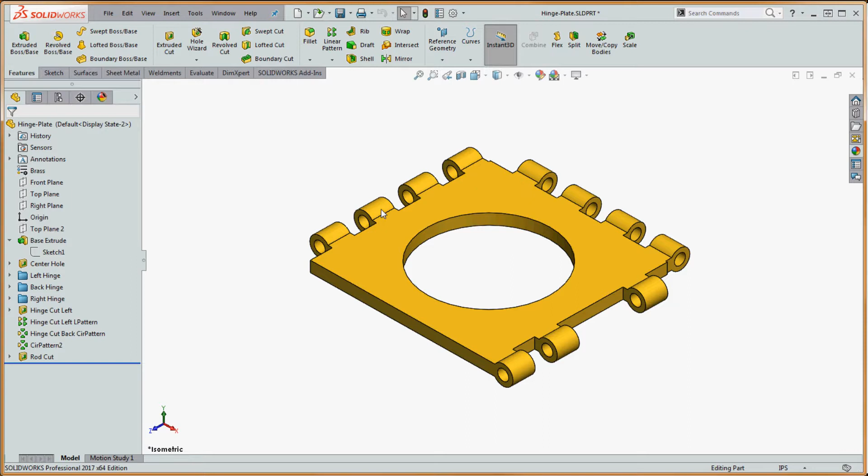So what we're going to be doing is making a cut here, and then with the linear sketch pattern we're going to take that square, that rectangle that's going to define this cut here, and pattern it at 1/2 inch all the way down to the end of our hinge plate.

So let's do this. Let's go ahead and go to our top plane, and let's go ahead and go normal to that, and we're going to take a look at that. If we click on the top plane, go over here to our view orientation, let's go ahead and scroll down to the normal button, and we're going to take a look at it here.

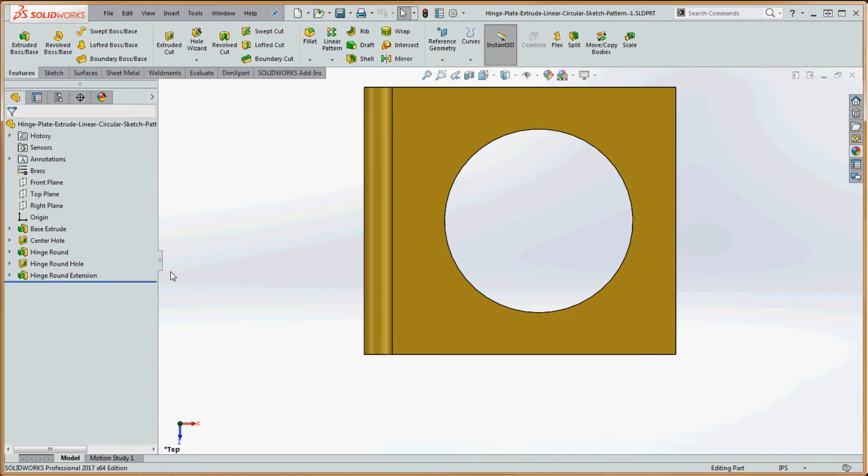What we want to do is go ahead and open up the existing sketch that we have in here, which is going to be sketch 1. We're not going to necessarily open it up, but we definitely want to show it. So we're going to right click on that, and tell it to show, because we're going to borrow some of the sketch geometry in order to put this together.

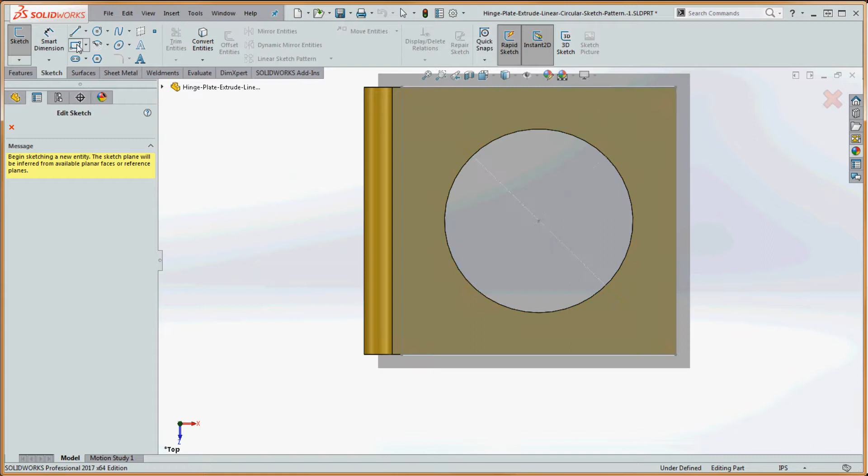So with that showing, we're going to go to sketch, go to corner rectangle, and start over here in the corner. We're going to go ahead and start on this surface over here in order to put that together.

Escape once if you accidentally put your cursor already down, but right click again and get you right back into that command. So just looking for geometry to sketch from.

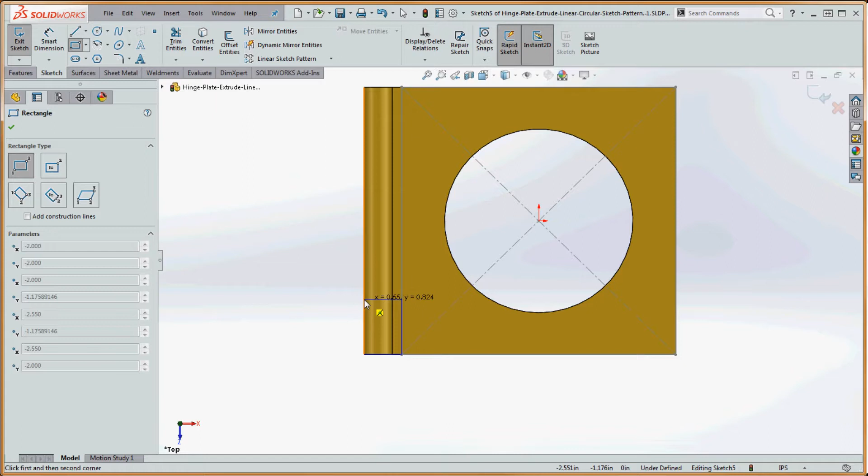We're going to go ahead and start with that point over here, sketch it over here. If we can pick up that, you can see that orange selection of that edge. We're going to go ahead and try to pick that up, and you can see the preview of what we're going to be getting in regard to the sketch relationship, which is going to be a coincident relationship, and we're going to go ahead and use that.

So now that we have that in place, we have a coincident relationship over here, coincident relationship in the lower right hand side, 2 verticals and 2 horizontals, and it's almost fully defined. What's not defined over here is the length of that, so we're going to go ahead and put a dimension on that, a smart dimension of 1/2 inch, so 0.5.

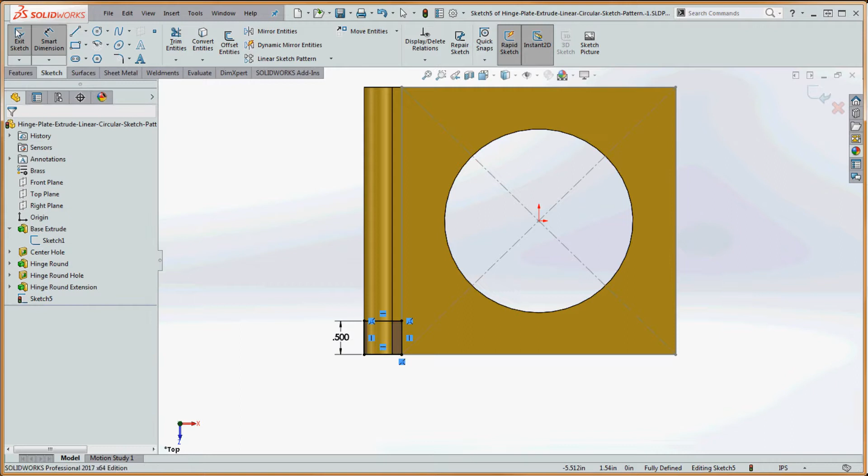And now we're going to go ahead and cut that. So we're going to go to Features, go to Extruded Cut. I'm going to go to Through All. And if we go to the green check mark, you'll notice we still have a little piece in here.

So what we had in here is we started from that plane. We did Through All, which went through all down to the bottom. What we really want to do is take that feature and do Through All in 2 directions, both directions.

And what that does is it's going to open up our direction number 2 down here when we do that. Let's go to Through All both, and it's going to go ahead and check mark that, and it's going to go Through All on the other side too.

So a little bit of a time saver. You make one selection here instead of having to come down here and check that box and go to Through All over here too. So you save yourself a few steps.

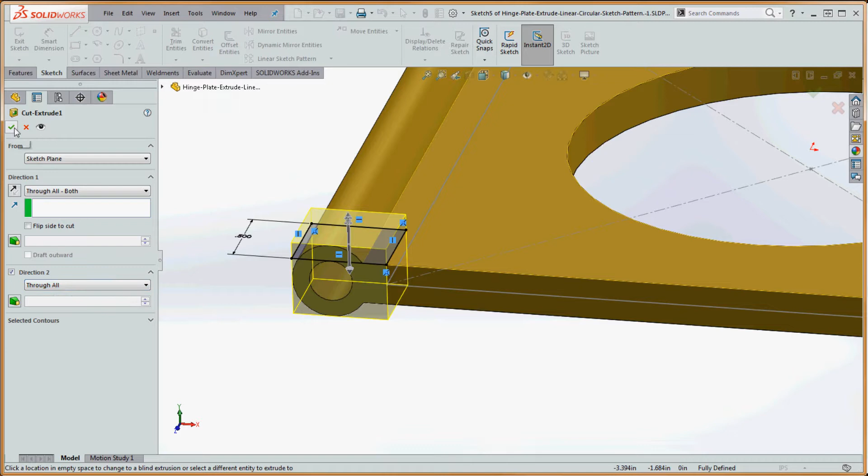Go to the green check mark, and now we have that in place. So let's go ahead and go to the isometric view and take a look at that from the very top, and we'll go on to the next step.

So just before we get into our linear feature pattern, let's go ahead and rename our cut extrude. We're going to call that something a little bit more descriptive and call that our hinge cut.

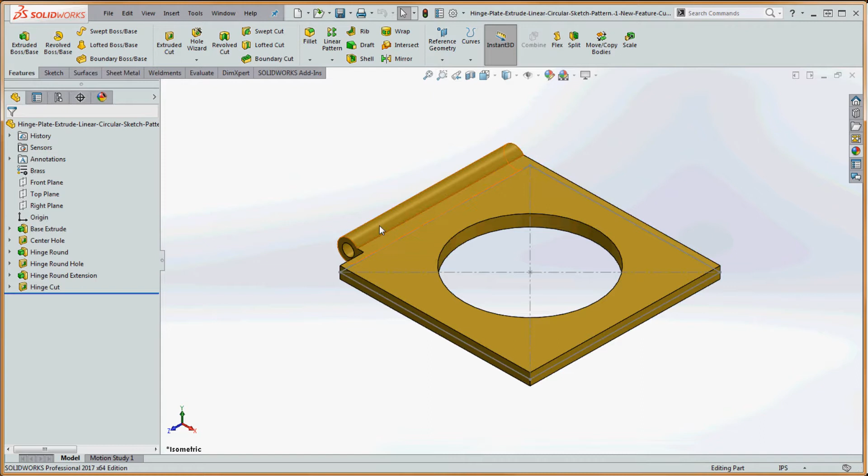So now we're going to take that hinge cut and we are going to pattern it, just like we did with the linear sketch pattern, up the hinge round. Let's go ahead and turn that model around a little bit and take a look at this and see if we can apply that.

First thing you want to do is go up to your Feature tab, go over here to Linear Pattern. We're going to go ahead and click on this, and this is just going to be a quick tour so I can show you some of the basics, because there is a lot in here and we don't necessarily need to go through all of this right now. We're going to save a lot of that detail for another video.

Essentially, from the very top, it's asking for a direction. So just like we did before, you want to click on an edge, and it's going to help define that. We know that this edge, since it's already involved in that feature, we're going to go ahead and click on this edge rather than another edge. If that other edge were to disappear or get modeled out of the model, we're not going to be able to select that. So we're going to select something that's pretty close to what we're going to be modifying, and we have a couple different choices here: spacing and instances.

So for instance, we could put a spacing in there. We know the spacing is going to be 1 — there's going to be one full cycle between a cut and a hinge and then back to the cut again. So we're going to type in 1 there. If we click off of the modeling area, that'll clear that. And then we're going to have 4 instances altogether.

We're not going to do a direction 2, although we're going to demonstrate that here in just a minute so we can see kind of a checkerboard as this thing goes across our item, because we don't necessarily have to stay within a linear direction as it implies. It could be kind of a matrix — in a way, it's like populating a feature within an area. It could be linear, but it could also expand across an area too.

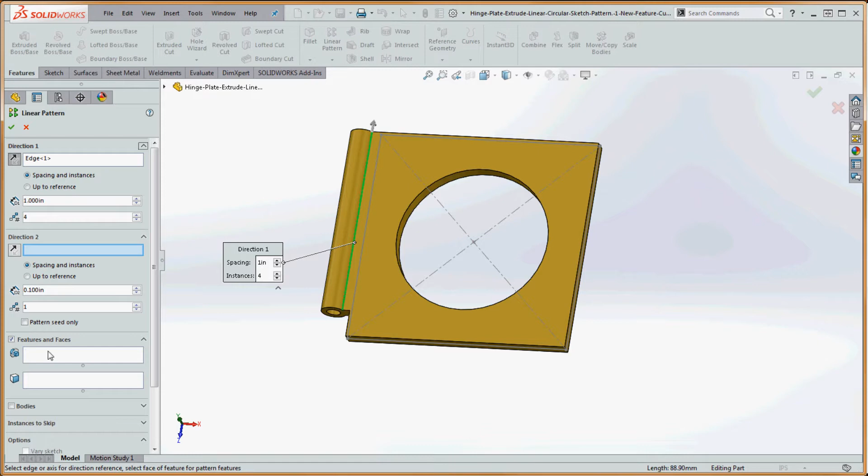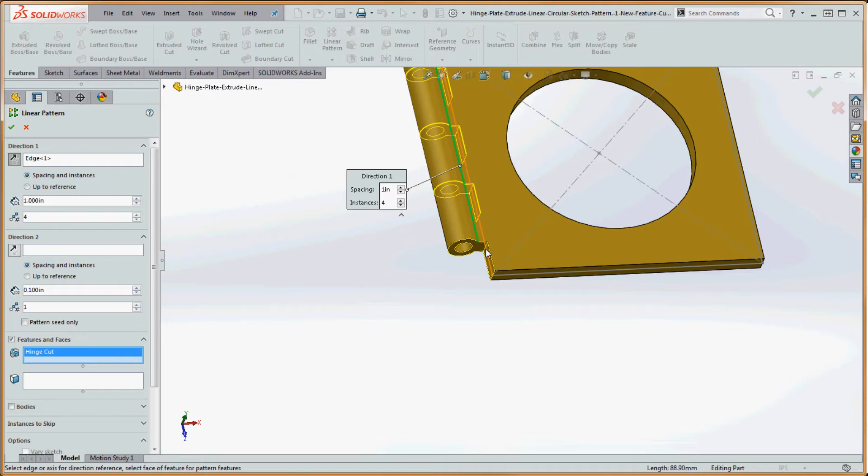Features and faces — a couple of different ways we could do this. We could select it within the modeling area and just select a face that might define what that cut was. That's going to be unique to that cut, so this face would work, but that face wouldn't. This face would work, but again, that face wouldn't either. So we can select it that way. It's going to put in that face in there, and it's going to borrow everything that's associated with that feature. Then if we go to the green check mark, now we have that in place.

So real quick, just to show you a different option: if we right-click and go back to the Linear Pattern, instead of going to that hinge cut, it did choose that actual name for that feature. So when we chose that face, it actually chose that feature. But we can go to the feature flyout and do the same thing — we can go down here to the hinge cut, select that, and then go to the green check mark.

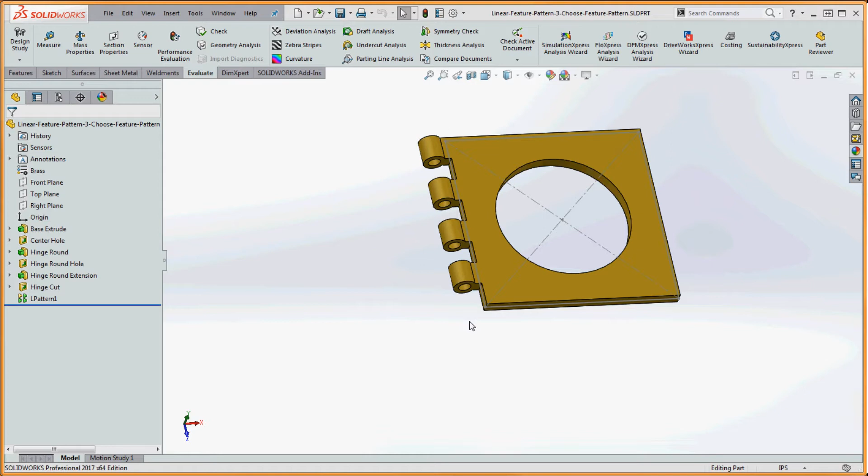Okay, now that we have a linear pattern the way we like it, we're going to break this and look at some other options on linear pattern from the top to the bottom. We're not going to look through all of them because we don't have a whole lot of time, but some of the basic ones I'd like to show you and what they might do.

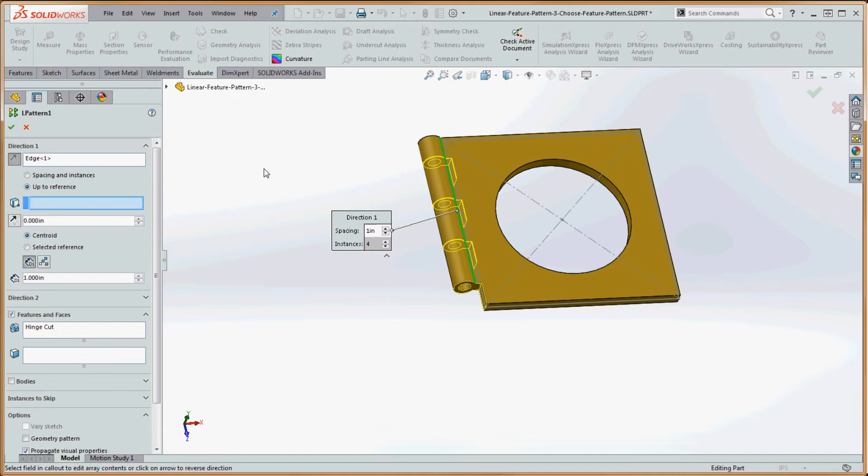So if you start from the top, we chose our edge, we're going to keep that. We did spacing and instances, but let's go ahead and do up to reference instead. If we click on that radio button, these two items over here, the distance and the instances, are going to disappear, at least some of those are going to get moved down. But for reference, we're going to choose this surface up here.

So if you think about what we're going to be doing, we're going to take that cut, go up to that surface, and put so many elements in here.

So the first thing it asks for down here is an offset. I'm taking my cursor and resting it over that input box, that selection box. If we type in maybe 2 inches out of a 4-inch block—oops, not 4 inches, we want 2 inches—it's going to ignore the first 2 inches of that 4-inch block. So if we did 1, it's going to ignore that top one up here and it's not going to give us what we're looking for. But that's what that offset does. So we're going to change that back to 0.

Now we're going to move down a little bit. We're going to continue to use Centroid in here, and now we're going to do our cut. Our cycle is going to be 1 inch, our cut's going to be a half inch. So if you do the distance down here of 1 inch and go to the green check mark, it still gives us what we're looking for down here. So that's yet another way of doing the very same thing.

So again, we chose that edge, no offset over here. We did the centroid of that cut, right in the middle of that cut, and then we're going to go off at a distance of 1 inch.

So while we're here, let's go ahead and take that bottom choice and change that. So a number of instances is another way of doing that. We're going to take the center of that cut and provide 4 instances in here. So this gives us something that's just a little bit different.

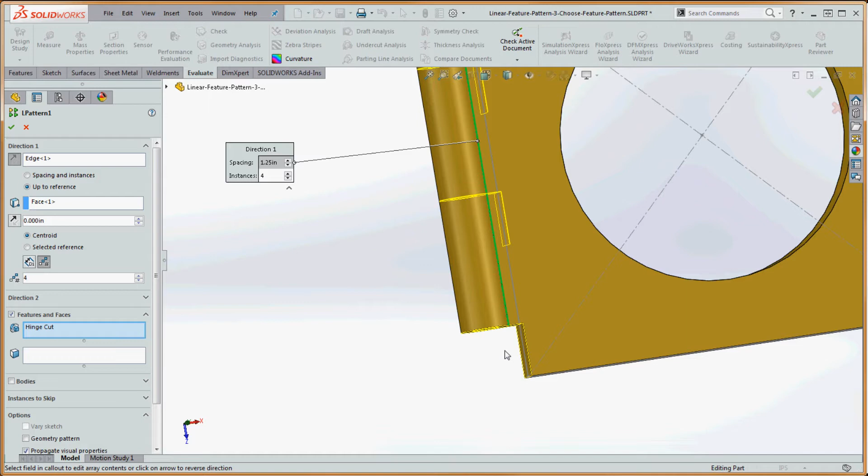What SolidWorks is going to do is take the centroid of that cut, the very center of that cut, kind of like a mid-plane extrusion, put it up here, extrude it back and forth, put it up here, back and forth, up and down, and then up here it's going to do down and then up, but the up is cutting into a void, so we're going to get something that isn't quite right. If you go to the green check mark, maybe this is something you might like to do, but what we have in here is a half inch cut here, half inch cut here, half inch cut here, then only a quarter inch cut over here. So these items inside of this are going to be a little bit longer. Let's see what those are.

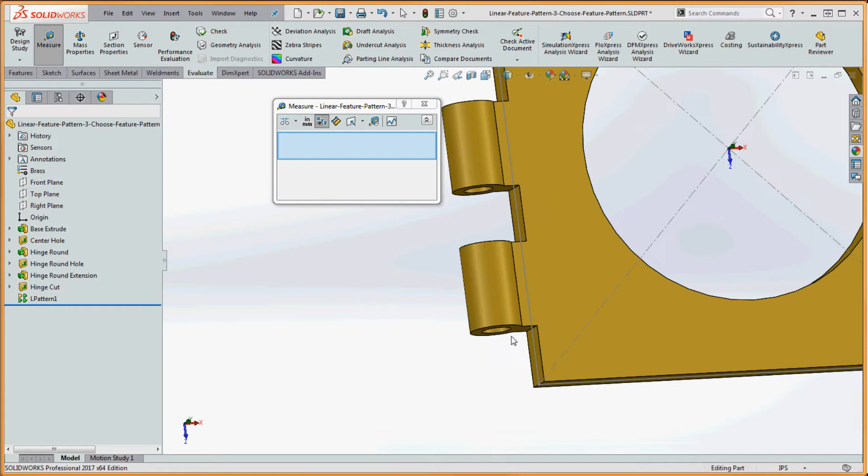If we go up to measure and click on some of these faces in here, that face of that hinge round and that one too, it's actually 3/4 inch. So what it's doing is taking the centroid of this cut, putting it here, cutting it top to bottom, putting it here, top to bottom, or left to right, or back to front. Then up here it's doing the same thing off of that surface, and of course the cut up here is not going to matter, and it's going to take whatever value is left for the distance it needs to allocate between these 3 hinge rounds. It's going to divide that by 3.

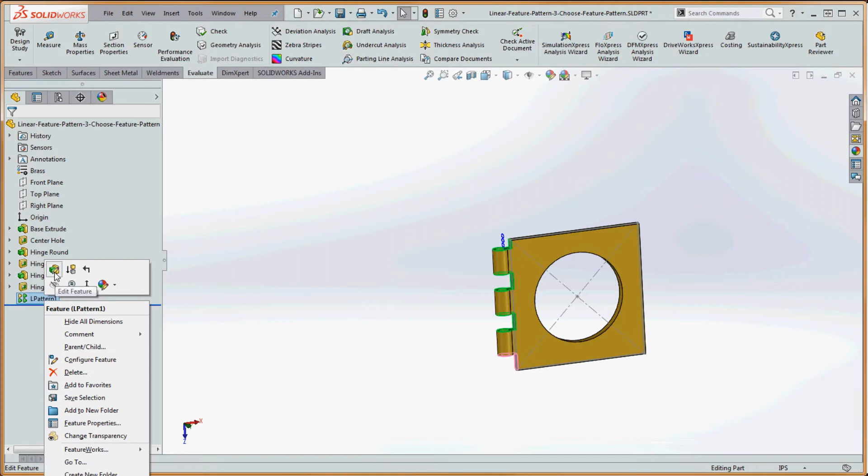And that gives us 3/4 of an inch. Not quite what we're looking for there, but it kind of shows you what it's thinking if we want to use that.

Another thing to do is, we did our instances in here, but we can go to selected reference and provide a different reference. If we select selected reference and choose this face of the cut, now it's going to do something a little bit different than what we had before.

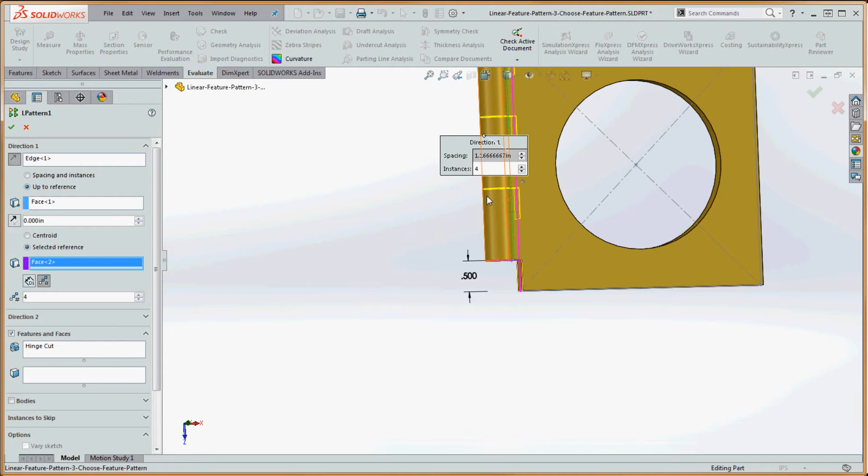We're going to ignore this because it hasn't really updated yet, but this dialog box that we can make changes to is going to change with it. So now what it's doing is taking that cut surface, and you can see the preview, it's going to cut it going down.

This one we're going to cut off that surface and come down, and at the very top surface here, the surface we selected for the direction, it's going to cut from that one down too.

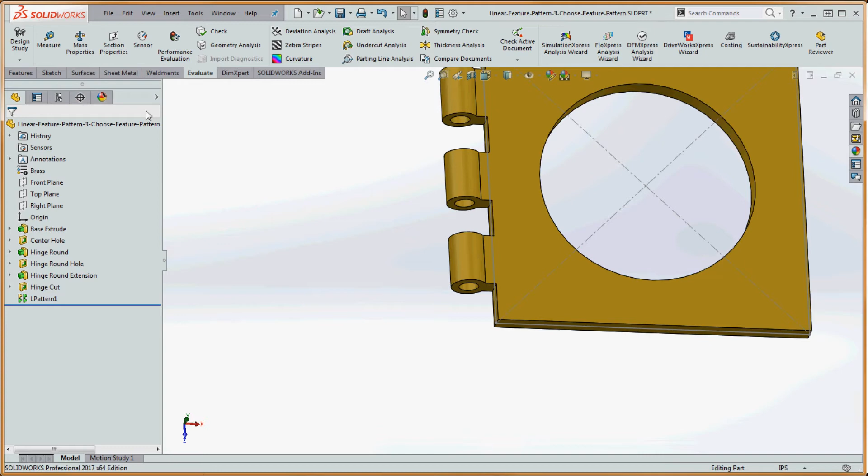So if we go to the green check mark, now we have what we want. And it should be the distance, it should be 1 inch between that surface and the other surface up there too. So let's go to measure, just to double check that.

Let's click this surface on that hinge round and that surface. And now it's not 1 inch, but 2/3 of an inch.

So what happened there? What it's doing is putting in 1, 2, 3, 4 cuts, but only 3 hinge rounds. So it's making a pattern of those cuts. By doing it, it puts in 4 cuts, but only 3 hinge rounds, so it's now right down the middle of our part.

It should be symmetrical. So let's go back into that and see what that looks like. So we did select a reference, did 4 cuts, but now it only has 3 hinge rounds. A little bit different way of doing it.

But those are some of the choices that you have. And if you go to the green check mark, it's going to go ahead and rebuild that.

Okay, so now this is broken, and what we just did is put in these 4 cuts. Instead of giving us 4 hinge rounds, now we have 3 hinge rounds right in the middle of the thing. So that might be something you'd like to do.

But let's go back into our linear pattern and break this some more. Let's go back to our original feature and go to some of the different options in this Properties Manager. If we go to Spacing and Instances, it's remembered the spacing we had before.

We're going to go ahead, and if we keep that spacing, let's see what happens. So it actually keeps that.

So if we go right back to linear pattern and do spacing and instances, we actually want to make that 1 inch. Again, we're going to bring that cut in from the top and make 4 of those elements. So now we have 4 cuts, and we also have 4 hinge rounds in there too.

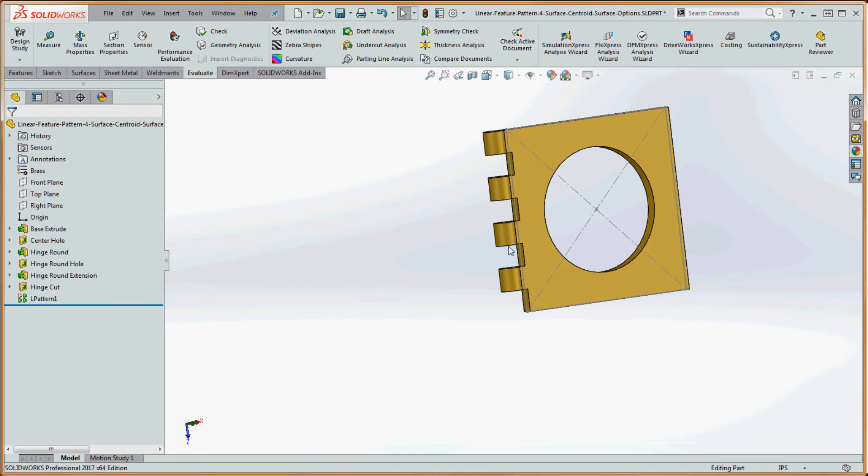So again, back to linear pattern, a little bit simpler this time. We're going to move down to Bodies. If we were to go in here and select different bodies, we could do that.

If you remember, the original hinge round in here was a separate body. So when you're doing a separate body here, you can't really choose features, at least not as easily. It doesn't always work that way, but bodies will work too.

So if we had separate bodies we wanted to choose around this model, that is a separate cylinder, we can do a linear pattern with that if we wanted to. So that's what bodies do.

Instances to skip, kind of like with the linear sketch pattern. We have the capacity to do that too.

So let's go ahead and rebuild this. We don't want to do bodies, we want to do features, so let's go back and re-choose that. Now you can see the preview of what we're going to be getting.

So for instances to skip, if you click inside of that, now we have those magenta or red balls in here. If we click on those, the magenta balls actually turn yellow for the instances we want to skip. So now we're going to skip the second instance, keep the third, but skip the fourth.

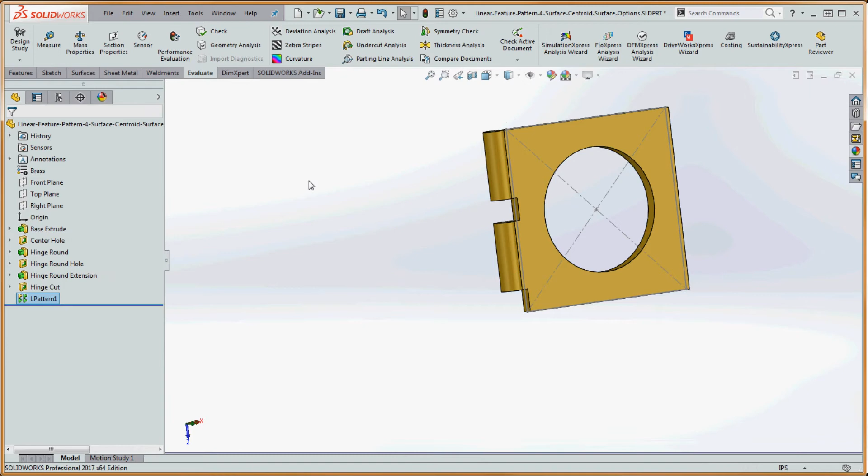Go to the green check mark, and now you can see what we're going to get with that. So we're going to go ahead and delete these.

We can go back into our modeling area and reselect that yellow button to get that magenta sphere or button back in. That's going to give us a preview of what we're going to be getting, back to where we were before.

Options. Geometry pattern is just a different way mathematically that SolidWorks will solve it. So if it doesn't quite work one way, you might consider geometry pattern as a way to try to make that work. Propagate Visual Properties.

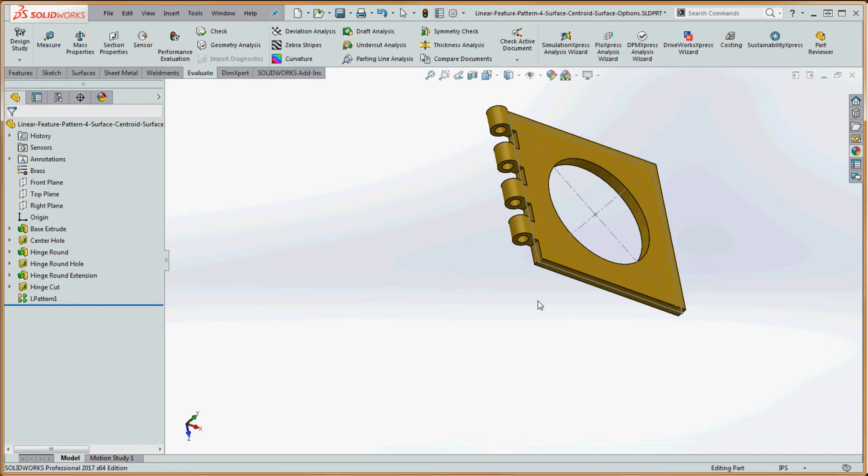Let's go ahead and do this real quick with our cut in here. Right now everything is pretty much homogeneous, but we can right click on that surface, and this is a real quick aside here, but we're going to go ahead and talk about visual properties in a different video.

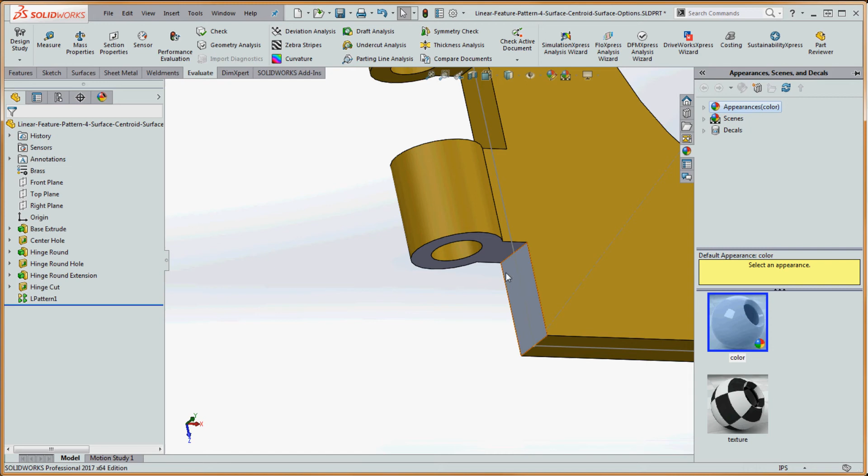If we were to change that and maybe make that hinge cut up here, we're just going to go back to gray instead of the brass color and go to the green check mark. So what it is, I just right-clicked on something that's endemic of that cut. I went up here to Appearances by right-clicking on that, and we just chose gray to be that hinge cut. So now that feature has got that gray color to it.

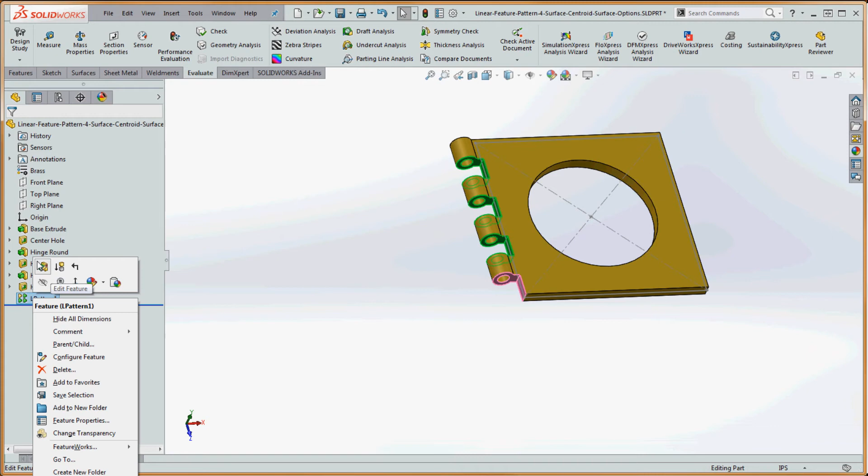If we were to go back to the linear pattern and make that change over here in regard to propagating visual properties, you'll notice that it isn't being propagated right now. If we right-click on that and go to Propagate Visual Properties, then go to the green check mark, now it's going to have that. So we had to make that change first and then update that.

So that's another option here: right-click back into linear pattern, and we can do the full preview, partial preview. We did instances to skip, instances to vary.

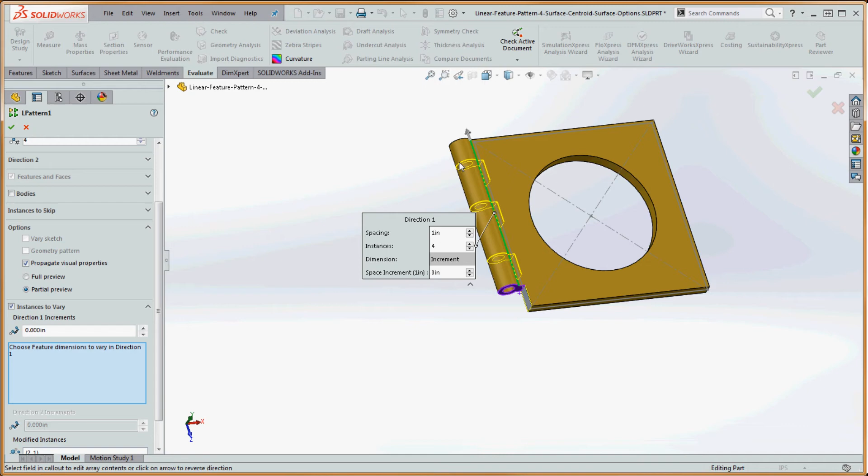We can click inside of this. It's a little bit more complicated, but for each one of these instances that we have here with that magenta ball or button, if we click on that, we can make a modification to that instance, that one instance only. Right now the spacing is 1 inch. We can make that one maybe 3/4 of an inch, and we could do that for each one of these.

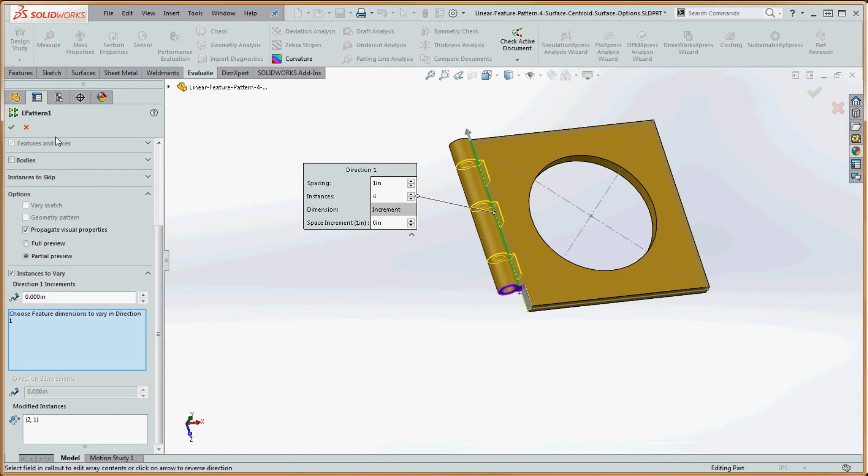So we're not going to spend a lot of time here; we're going to cover that in a different video with a lot more modifications. But just like with instances to skip, it gives us the coordinates of the different instances that are being modified, and then individually they show up in the modeling area, where we can make modifications too. If we go to the green check mark, now you can see that. If we click inside of this, we can change some of these values, or go back into our pattern and make our changes there too.

So one thing else I want to show you here before we leave this, let's go ahead and go to the green check mark, and then we're going to come right back to this. So we almost have this really broken, and we're going to make it even more broken here.

If we go back to our linear pattern and check one more option here I'd like to show you. We've done everything in a linear way along what's called a linear feature pattern, but we could actually make a matrix out of this and populate a pattern about an area rather than just along a line. We could do that too, and what we want to do is go down here to direction 2 and open that up to make modifications.

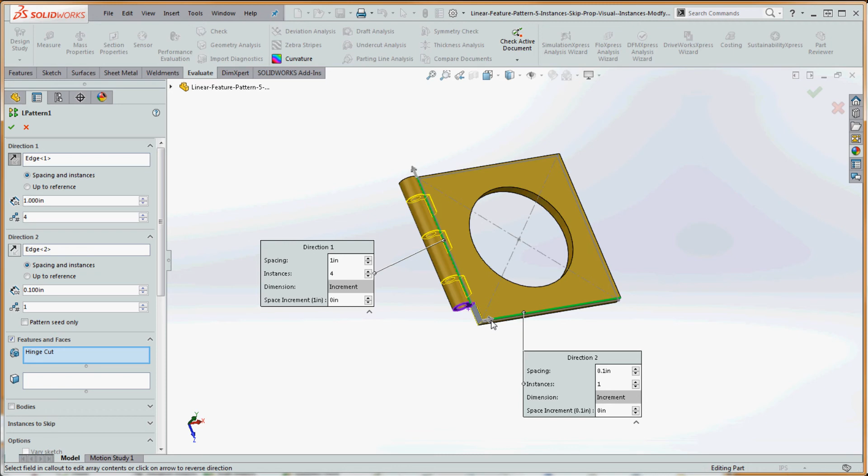So with direction 2, we can define yet another edge and go off in a different direction. You notice we have an arrow down here too. We can change the direction. We didn't talk about that last time, it's a little bit obscure. Can't really zoom in on it, but you can see that arrow down here. You can change direction, or go up here with our direction and maybe change the direction over here too, that button right next to the edge we're making the selection for. So the distance here, maybe half an inch. And then instances, remember, is just going to keep that one instance and keep it linear unless we type in a value that's more than 1.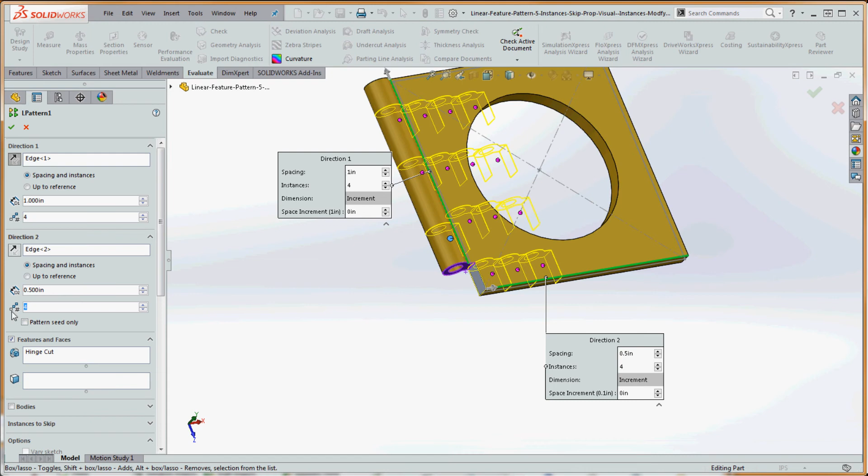So if you do maybe 4, you can see what that pattern is going to look like. Maybe 7, take it all the way to the end. And maybe half inch is probably a little bit too close, maybe 3/4 of an inch, see what that looks like. So now you can see what that looks like.

So it's taking that original pattern, kind of ignoring the modification we made down here, and it's putting it up there. So these boxes kind of start getting in the way after a while. If you want to minimize them, you can do that too.

And for each one of these elements in here, if you want to make a change to that, if you go into that and modify the instance, you can do it there too, and it brings up yet another dialog box you can play around with.

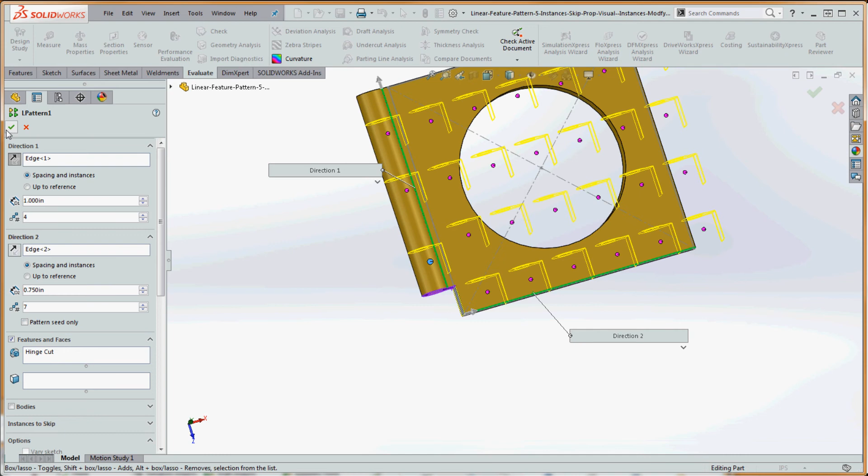So once you do that, if you go to the green check mark, it's going to propagate the visual properties. So you have that gray cut in there, and it goes across our model, and that's kind of what it looks like. So now that our model is completely broken here, I'm going to challenge you to put that into an assembly.

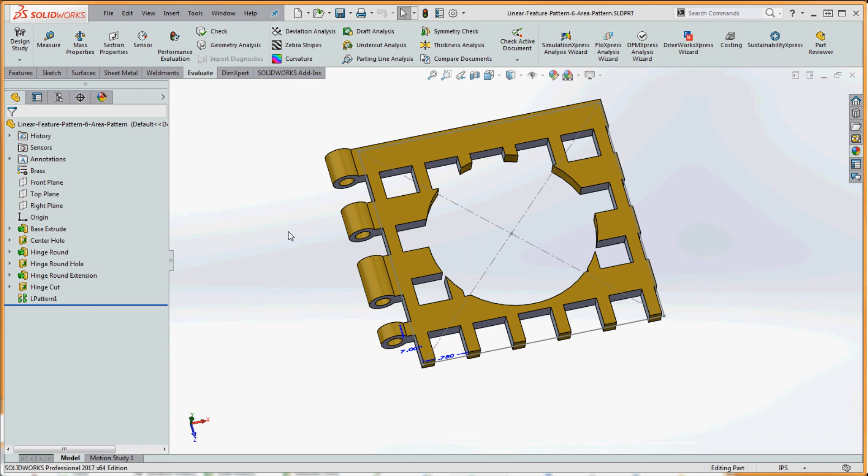So we got this really broken, but let's go back to what we had before, what we really want, and stop goofing off here. Let's go ahead and start by going to that linear pattern.

Let's call that our hinge cut pattern instead, something that's a little bit more descriptive. So we're going to call that hinge cut, and then pattern.

If we were to right click inside of that, let's go back to the settings that we really want. So if we start from the top and work our way down, we chose that edge over here, spacing instances as opposed to up to reference.

Either of those will work. You have a little bit more flexibility with up to reference. You get a little bit more exotic designs by doing that, depending on what you need.

But our distance between the cycle over here, between a half-inch cut and a half-inch area, or linear distance that we're going to allocate to the hinge round, we're going to make that 1 inch, so that's going to be good.

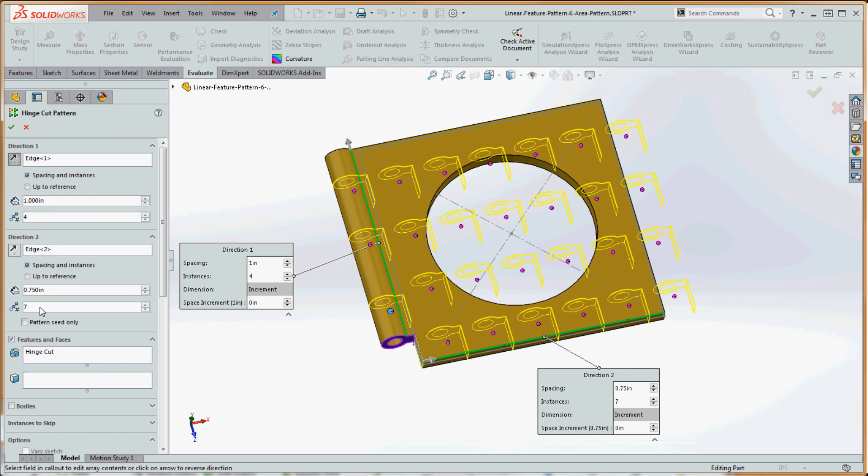Direction number 2, if we want to get rid of that, just go down here to a single instance of that. So it doesn't matter what values we put in here, it's always going to be parked down here with 1 instance, and it's not really going to change anything there.

So you can't put 0 in there. If you try to do that, it's going to revert back to 1, so it's going to at least look for 1.

Pattern seed only, that's a different option in here too for direction number 2. We're going to cover that in another video, but essentially what it does is it takes the base pattern here and then propagates it out into your area. But we'll talk about that later.

The features and faces, we're going to go ahead and keep that. Propagate Visual Properties, we're going to keep that too, but we're going to go ahead and change that color of that cut, I'll show you how to do that. And the instances to skip, we're just going to unclick that, so we're going to get back to where we were before.

If you go to the green check mark, now you can see what we have. So let's go up here and let's go ahead and look at our colors. If you click up here, slowly rest your mouse up here, it kind of shows you what you have in here. This is our display pane.

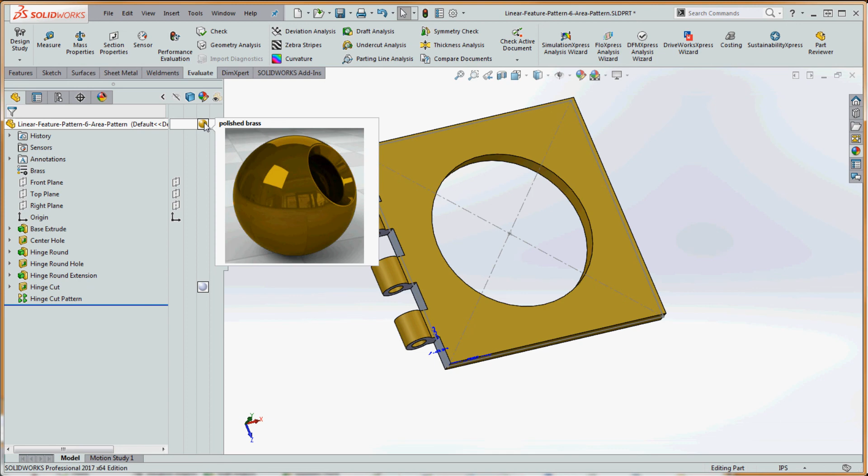And if you go over here to the right one under appearances, again we're going to cover this in a visual appearances video in another video, so look for that. What we have up here is a simple brass color, polished brass for our part that we have in here. We have an aberration down here with a gray color over here for our hinge cut.

If we were just to right click on that, we could just remove that appearance. And once we do that, we'd have to rebuild that. If that doesn't work, the Propagate Visual Properties, we're going to have to go back into our hinge cut pattern, edit that, and then go back to the green check mark without changing anything, and it's going to propagate those patterns.

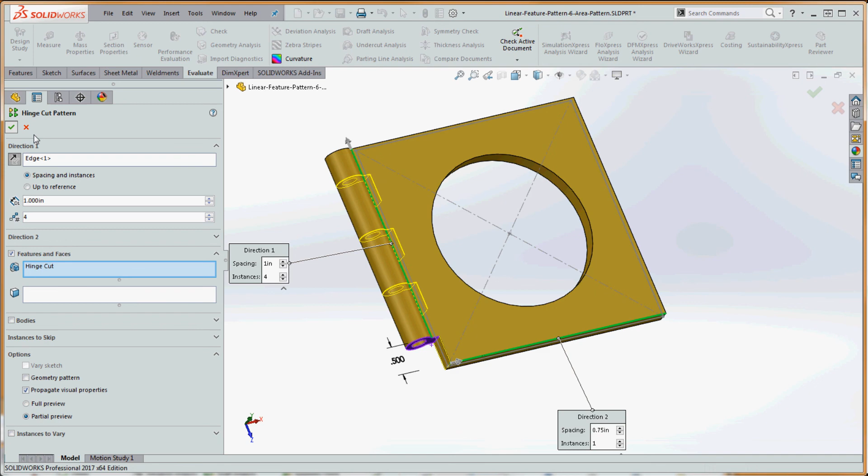So there you have it, a short tour of the linear feature pattern where we took the original hinge cut and propagated it along the hinge round.